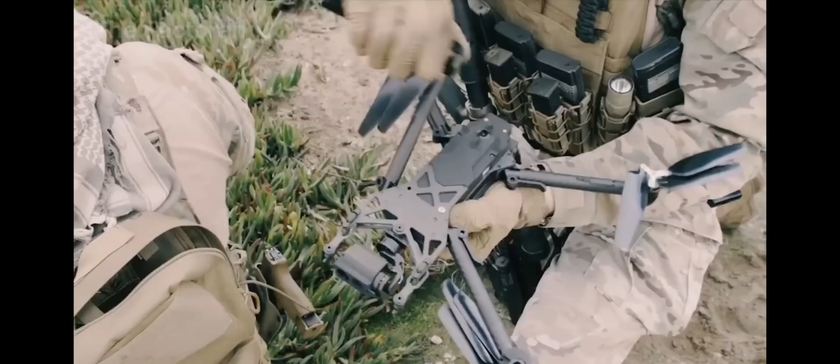Drones are at that exact moment right now. They look like toys. Some of them are toys. But underneath, there's an industry that governments are pouring money into, because whoever controls the airspace, cheaply, safely, at scale, controls a huge slice of farming, logistics, defense, mapping, and emergency response. Let me give you the real picture, not the brochure version.

In India, farmers are using drones to spray pesticide over an entire acre in about 7 minutes, work that used to take a man with a tank on his back the better part of a day, breathing in chemicals the whole time. That's not a gadget. That's a health upgrade and a time machine rolled into one.

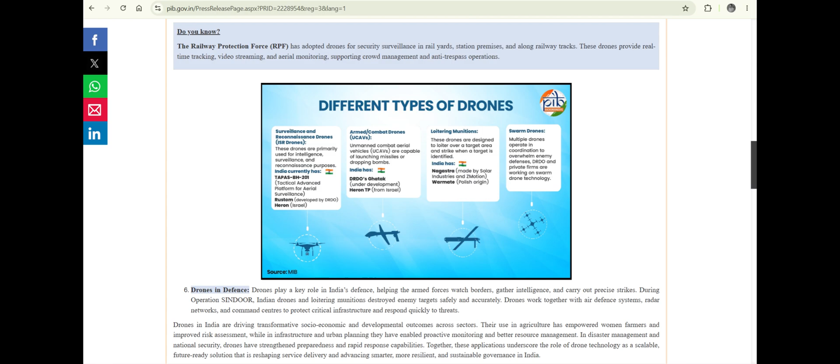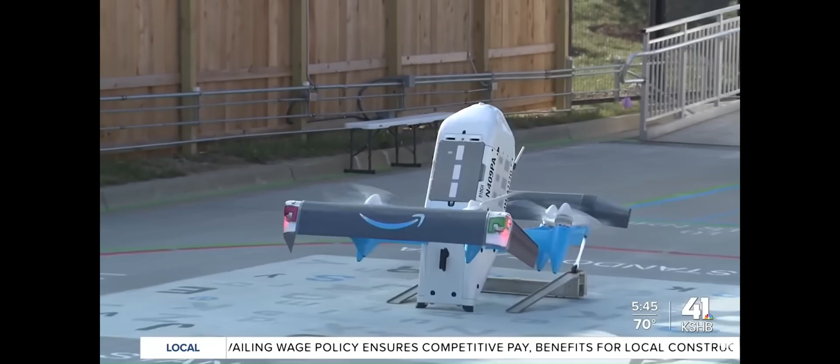In the military, surveillance drones can loiter over an area for hours, silently, watching, without putting a single pilot at risk. That capability has completely rewritten how modern conflicts are fought. Amazon and a dozen other companies are running real delivery experiments. Drop the package in the backyard. No truck, no traffic, no driver. It's not everywhere yet, and there are good reasons for that we'll get to. But the prototypes fly today.

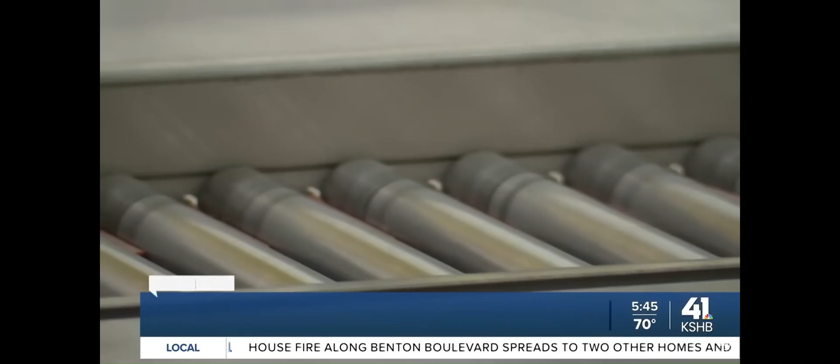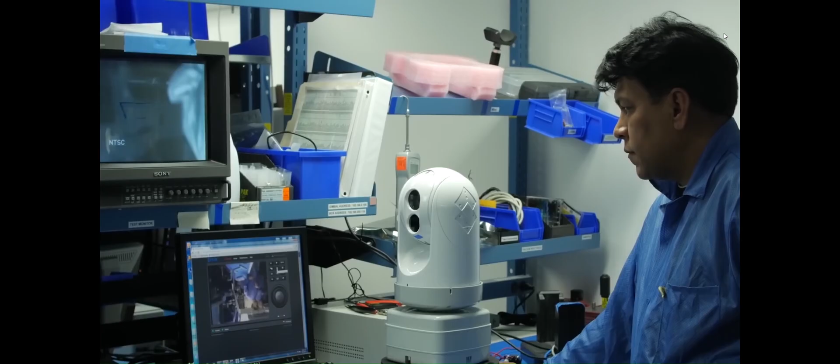In search and rescue, a thermal camera drone can sweep a hillside at night and spot the body heat of a missing hiker in 20 minutes, a search that would take a human team an entire freezing night and might fail anyway. Engineers use them to inspect bridges, cell towers, wind turbines, and power lines, climbing 200 feet so a human doesn't have to dangle off a rope to check for a crack.

And, my personal favorite, those jaw-dropping drone light shows, where 500, 1,000, sometimes 10,000 drones paint a moving picture across the night sky. Every one of those dots is a flying computer holding its exact GPS position to within a few centimeters. That's not magic. That's the stuff we're about to learn.

So here's my promise. If you stick with me today, you will never look at a drone the same way again. You'll see the forces, the physics, the brain inside it. Let's go. Okay. First question.

What is a drone? And before you answer the flying thing with 4 propellers, let me stop you. Because that's like saying a car is the thing with 4 wheels. Technically true, completely missing the point.

Here's the cleanest way I can put it. A drone is any aircraft that flies without a human pilot sitting inside it. That's it. That's the heart of it. No cockpit, no person on board. The pilot is somewhere else, on the ground with a controller, or not even controlling it at all because a computer is. Now, here's where it gets interesting.

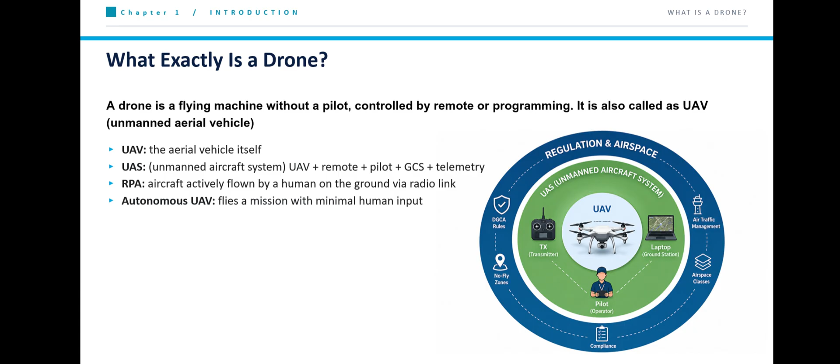Your hobby drone? You're flying it, so it's mostly an RPA. But the moment you hit return to home and it flies itself back and lands on its own, congratulations, for those 30 seconds it became autonomous. See how these aren't rigid boxes? They're modes. That's the practical truth most beginners miss.

Now, how did we get here? Because drones did not start as fun. Let me tell you the story, and I promise it's better than it sounds. Rewind to 1918, the First World War. There's an engineer named Charles Kettering, same guy, by the way, who later helped invent the electric starter in your car. And the US military asks him to build a flying bomb.

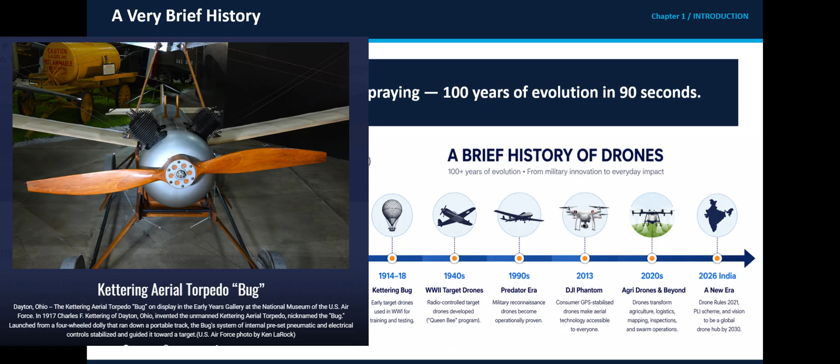Not a missile as we know it. A little wooden and canvas biplane with no pilot that you'd wind up like a clock. It would fly a set distance, the wings would literally fall off on a timer, and it would drop onto the enemy. They called it the Kettering Bug. And honestly, it barely worked. It crashed more than it flew. The war ended before it ever saw real combat.

But here's why it matters. For the first time, somebody built an aircraft designed to fly without a person inside it. The idea was born. A flying machine that didn't need a human heartbeat on board. Fast forward to the 1930s, Britain.

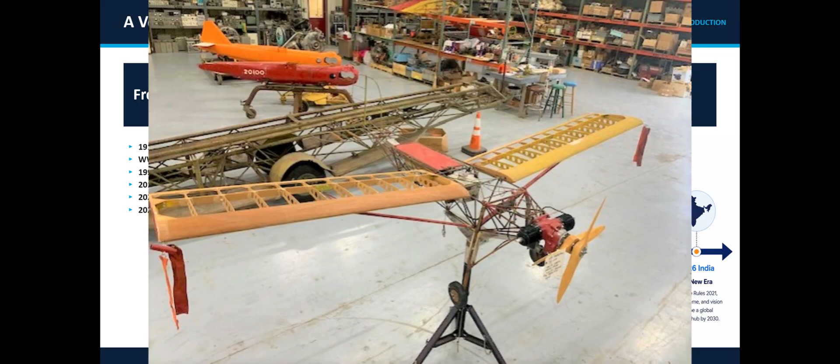The Royal Air Force needs targets for their gunners to practice shooting at. Real planes are expensive and have people in them. So they build radio-controlled aircraft to fly around as flying targets. And they give it a wonderful name, the Queen Bee.

And here's a little piece of trivia I love. A lot of historians believe that's where the word drone comes from. A drone is a male bee. The queen bee was the target. The smaller pilotless aircraft buzzing around? Drones. The name stuck for 100 years because of a bee joke. Aviation, ladies and gentlemen. Now jump forward to the 1990s and 2000s, and the story turns deadly serious.

The Predator drone. This is the machine that changed modern warfare. Suddenly, you had an aircraft that could stay in the sky for 20+ hours, beam back live video, and be flown by a pilot sitting safely on another continent. No pilot at risk. Eyes everywhere, all the time. Every military on Earth took notice, and the drone arms race began.

So for almost 90 years, from 1918 to about 2010, drones were basically a military story. Expensive, secretive, scary. And then one company flipped the entire script. A Chinese company called DJI. Around 2013, they did something nobody else had managed. They took all this insanely complex flight technology, the stabilization, the GPS, the cameras, and they packed it into something a teenager could buy and fly in their backyard for a few hundred dollars.

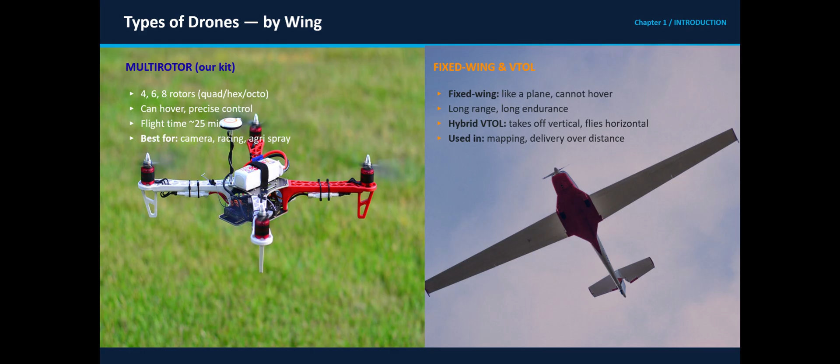So already you see the tension, right? Multirotor. Amazing control, terrible endurance. Fixed wing. Amazing endurance, can't hover. Wouldn't it be great to have both? Type 3. VTOL. Vertical takeoff and landing. And this is the clever hybrid.

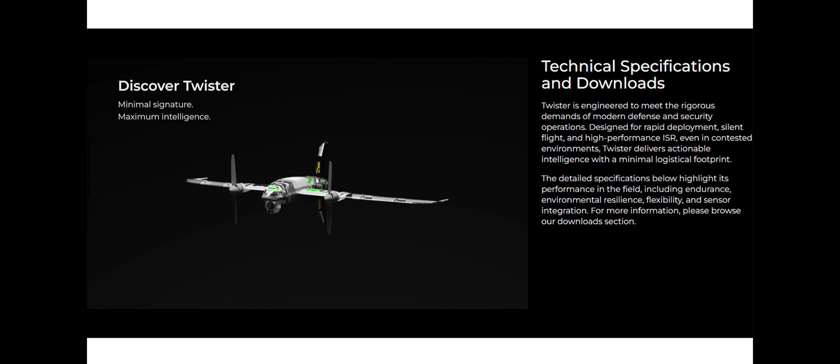A VTOL drone takes off straight up like a helicopter, props pointing down, then tilts and transitions into flying forward like an airplane on its wings. Best of both worlds. Take off from a tiny space, then cruise efficiently for hours. The perfect everyday comparison? A VTOL is like a hybrid car. A petrol car has great range, an electric scooter is great in the city. The hybrid tries to give you both.

VTOL drones try to give you the hover of a helicopter and the endurance of an airplane. They're more complex, more expensive, harder to engineer. But for things like long-range delivery and military reconnaissance, they're becoming the holy grail. Three families: helicopter, airplane, hybrid. Keep those pictures in your head.

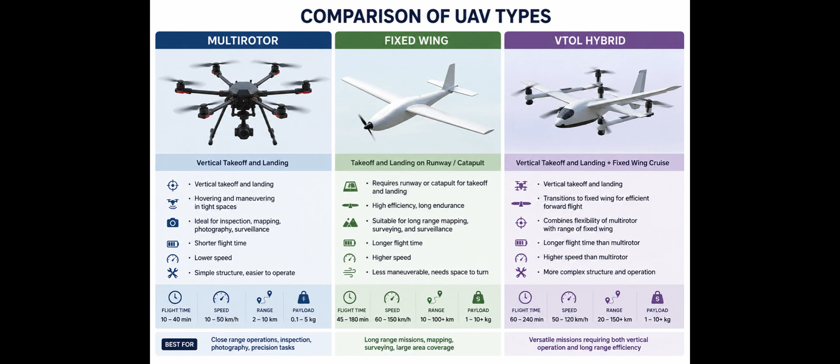Now, since most of you are going to start with multirotors, let's go deeper into this family. Because multirotor just means more than one rotor, and the number of rotors changes everything. Let's count up. Single rotor, one main rotor. This is basically a tiny helicopter. And the most famous example is a jaw-dropper, the Black Hornet Nano.

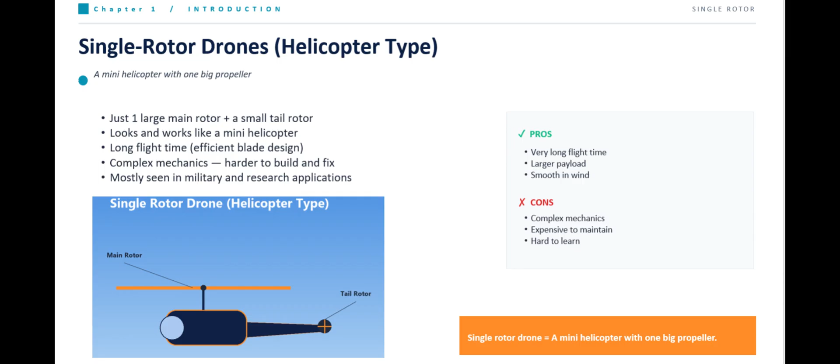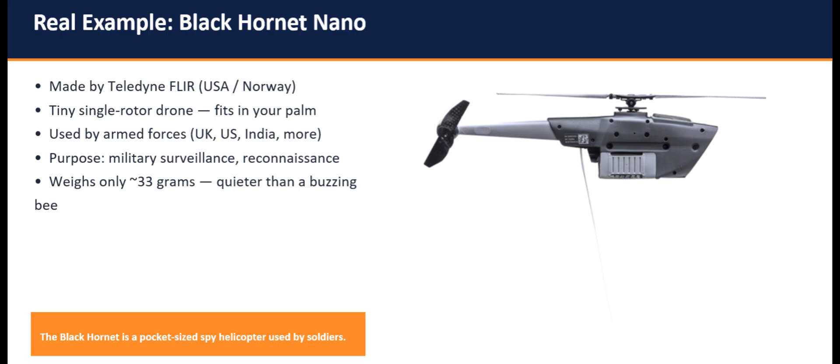This is a military micro-drone, so small it fits in the palm of your hand, weighs about as much as a few sheets of paper, and soldiers carry it in their pocket. They throw it up, and it silently scouts around the next corner or over the next wall, sending back video, and the enemy never even hears it.

A pocket-sized helicopter spy. Single rotor designs are efficient, but they're mechanically complex. Like real helicopters, they need a tail rotor and a complicated head to control them. Tricky to build, tricky to fly.

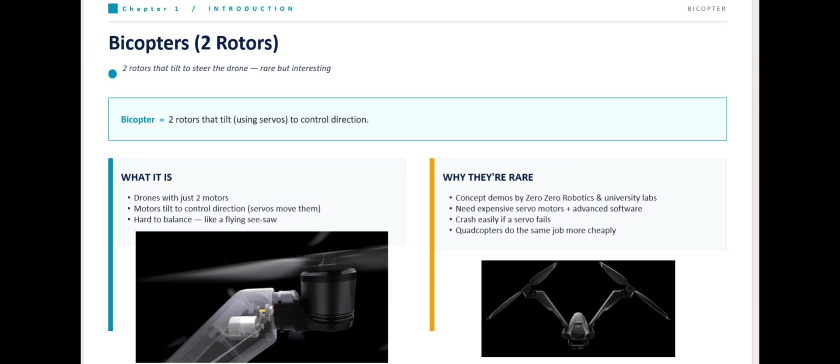Bicopter. Two rotors. And here's a fun one. Why did the bicopter basically never catch on? Because two motors is just not enough control. With only two points of thrust, the drone has to physically tilt its motors with extra mechanical parts just to steer and stay stable. It's wobbly, it's complicated, and it gives you all the headaches with none of the benefits.

So engineers mostly looked at it and said, yeah, let's add more motors. Nature did the same thing with insects. By the way, almost nothing useful balances on just two points.

Tricopter. Three rotors. Now this one is genuinely interesting from an engineering point of view, and it teaches us something important. Three motors can lift you fine. But here's the problem. Yaw. Yaw is rotation, spinning left and right, like shaking your head no. On a tricopter, you've got three props, and the math doesn't balance out cleanly to control that spin.

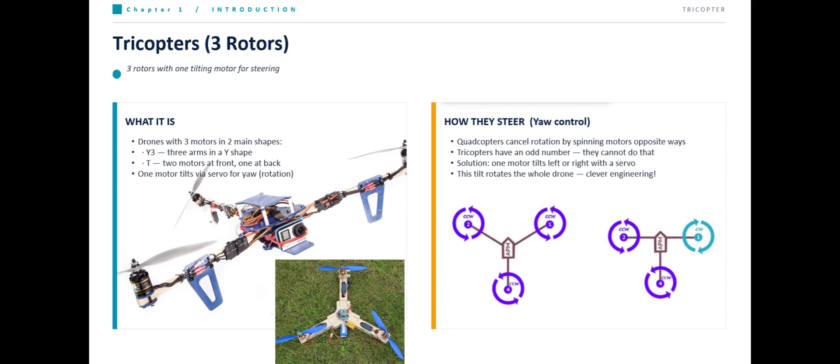So tricopters use a little servo motor that physically tilts the rear motor to control yaw. It works, and tricopters fly beautifully and smoothly. But that tilting mechanical part is one more thing to break, one more thing to fail. Remember this yaw problem, because in a second you'll see how the quadcopter solves it with pure elegance and zero moving parts.

Quadcopter. Four rotors. And this is the king. This is the one on my table. This is 90% of the drones you'll ever see or fly. Why? Because four is the magic number. Four motors give you perfectly balanced lift, perfectly balanced control.

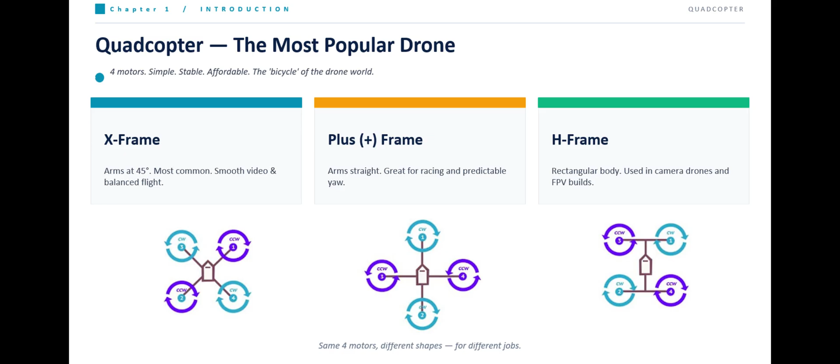And here's the beautiful part. You solve that yaw problem with no extra mechanical parts at all. Just by spinning some motors a little faster than others, you get full control in every direction. Simple, cheap, reliable, brilliant. The examples here are the famous ones.

The DJI Mini Series, tiny, featherweight, designed to slip under the strictest weight regulations so beginners can fly almost anywhere. The DJI Air Series, the sweet spot, more camera, more power, still portable. The DJI Mavic Series, the foldable pro-grade workhorse that put a cinema-quality camera in a backpack.

And on the wild end, FPV racing drones, where pilots wear goggles, see through the drone's eyes, and rip through courses at over 100 kilometers an hour. Same four-rotor layout. Completely different soul. One's a flying tripod, the other's a flying roller coaster.

Now let's go bigger. Hexacopter. Six rotors. Why would you need six? One word, and it's the most important word in professional drones: redundancy. Let me paint you a scene. You're a film crew. You've strapped a $40,000 RED cinema camera under your drone. You're flying it over a crowd at an outdoor concert. You've got one shot at the scene.

Now, what happens if a motor fails midair? On your little quadcopter, a motor failure is a disaster. You've lost one of four corners of lift. The drone immediately becomes unbalanced and flips, and it falls out of the sky like a stone. $40,000? Gone. Worse, it falls into a crowd.

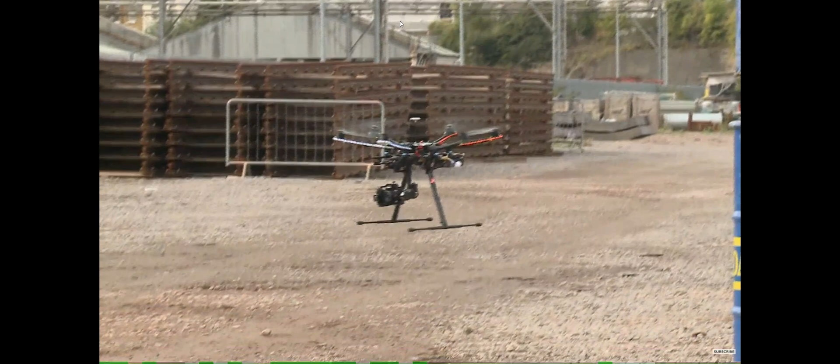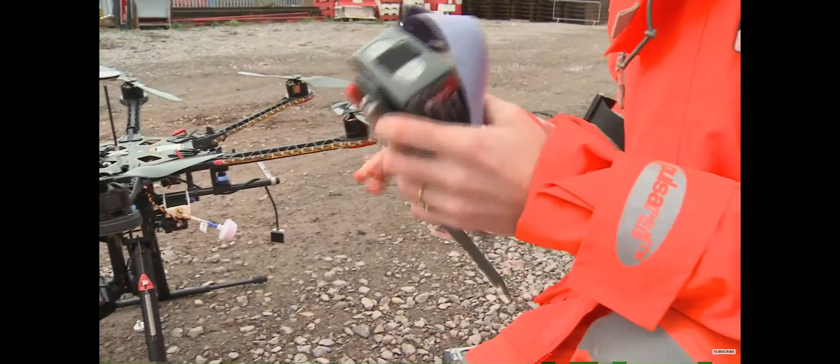On a hexacopter, one motor dies, and the flight controller, the brain, instantly goes, "No problem, I've got five more." It redistributes the power across the remaining motors and keeps flying, or at least limps down to a safe, controlled landing. That single extra layer of safety is everything when there's expensive gear or people below.

That's why you'll find 6 rotors on the DJI Matrice 600, on professional cinema rigs carrying those RED cameras, and on industrial inspection drones crawling over oil refineries and power lines where a crash isn't just expensive, it's dangerous. Redundancy. Write that down. It's the reason professionals add motors.

Octocopter. 8 rotors. Now we're at the top of the food chain. Why 8? 2 reasons, and they're the same 2 reasons rolled into one big machine. First, raw lifting power. 8 motors can hoist heavy payloads. Second, even more redundancy. You could lose a motor, maybe even 2, and still fly home safely.

The poster child here is the Freefly Alta X, an absolute beast of a flying platform that the film industry trusts with cameras worth more than a car. We're talking heavy lift cinema setups, large agricultural drones hauling tanks full of pesticide over fields, industrial logistics drones moving real cargo. So why do movie productions hand their most expensive equipment to an octocopter and sleep fine at night?

Because they're not paying for the 8th rotor to go faster. They're paying for insurance. They're paying for the night the director gets the perfect golden hour shot, a motor coughs and dies, and the drone just shrugs and keeps filming. When the gear under your drone costs more than your house, you do not gamble on 4 motors. You buy 8. Redundancy, again.

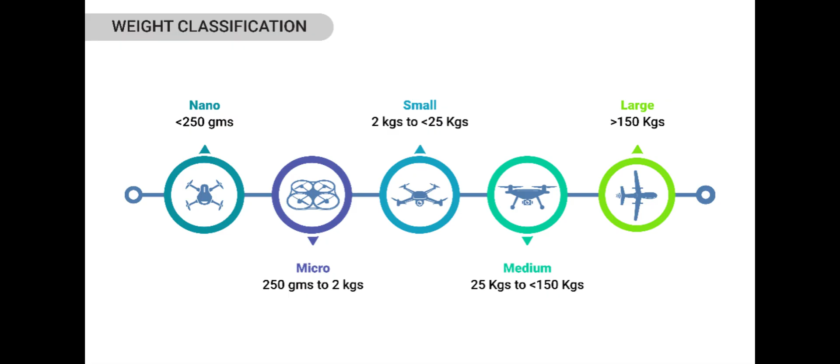Micro. From 250 grams up to 2 kilograms. This is where a huge chunk of hobby and prosumer drones live. Your DJI Air, many Mavics, lots of camera drones. Heavier, more capable, more camera. And now the rules tighten a bit. You're starting to carry enough mass that the regulator pays attention.

Small, from 2 kilograms up to 25 kilograms. Now we're into serious working machines. Many professional cinema drones, survey drones, and the smaller agricultural sprayers land here. These aren't toys anymore. These are tools that earn money, and the rules reflect that.

Medium, from 25 kilograms up to 150 kilograms. This is heavy lifting territory. The big agricultural spraying drones that haul large tanks of liquid across farmland often sit in this class. Big delivery drones too. At this weight, you're operating a genuine aircraft, and certification and permissions get serious.

Large, above 150 kilograms. And now we've left Hobbyland entirely. This is the domain of military drones and major commercial cargo and surveillance aircraft. A drone this big is treated almost like a manned aircraft, because in terms of mass and risk, it basically is one. The Predator we talked about earlier, that's not a drone you fly in a park. That's large category aviation hardware.

So look at the whole ladder. A 249-gram DJI Mini in your backpack and a 1,000-kilo military surveillance aircraft are both technically drones, but the DGCA treats them completely differently. And now you understand exactly why. Weight equals risk. Risk equals rules. The heavier you fly, the more the sky demands of you.

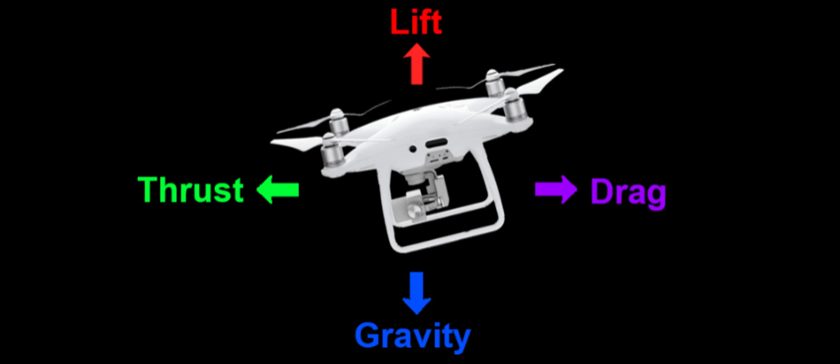Let me make thrust physical for you. Have you ever stuck your hand out the window of a moving car? Of course you have. Now, tilt your hand up slightly, palm angled into the wind, and what happens? Your whole arm gets pushed back and up. You can feel the air shoving it. That push is exactly the kind of force a propeller creates, just controlled and aimed. Your hand became a wing. You've been doing physics experiments out of car windows your whole life and didn't know it.

Force 4. Drag. This is the invisible enemy, air resistance. The friction of pushing through the atmosphere. Drag always fights your motion. It's constantly trying to slow you down. Anything moving through air feels it. The perfect example? A motorcycle. When you ride slowly, you barely notice the air.

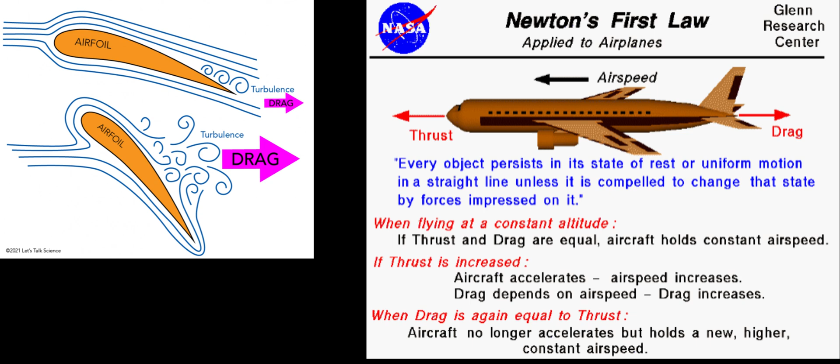But twist the throttle and hit 100 kilometers an hour, and suddenly the wind is screaming past you, trying to rip you off the seat, pushing back hard against your chest. That push is drag. The faster you go, the harder drag fights you. It's the reason racing motorcyclists tuck down flat. They're hiding from drag. And it's why drones, jets, and even cyclists are shaped smooth and sleek. Every curve is a little argument against drag.

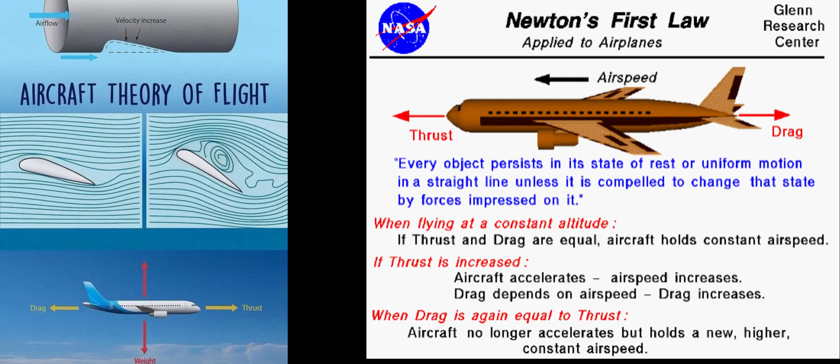So there it is. 4 forces, locked in a constant tug-of-war. Lift versus weight, up versus down. Thrust versus drag, forward versus backward. Every flight you've ever seen is just these 4 numbers shifting around.

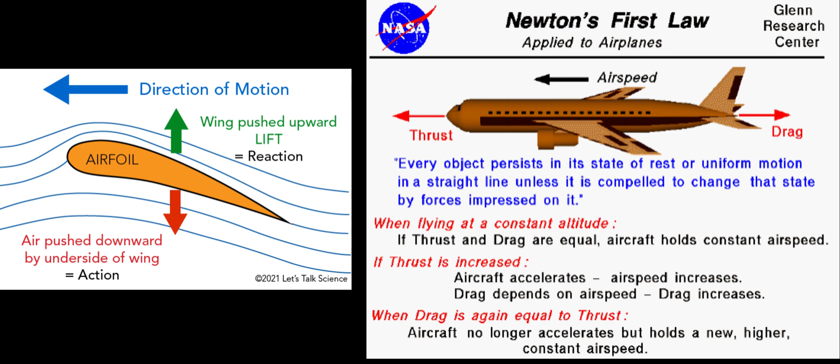Want to climb? Beat weight with lift. Want to speed up? Beat drag with thrust. Want to hover? Make it all a perfect tie. That's flight. That's the whole secret.

And one more time, throw a paper airplane across the room. In that 2-second flight, all 4 forces were at play. Lift held it up, weight pulled it down, your throw gave it thrust, and drag slowed it until it lost the fight and glided to the floor. 4 forces in a toy made of paper. The sky doesn't care if you're a Boeing or a paper plane. Same rules for everyone.

So lift is the hero. But how does a spinning piece of plastic actually create it? This is where most explanations either lie to you or bore you, and I want to do neither. Because the truth is, there are 2 explanations, and both are right, and engineers use both. Explanation 1: Bernoulli's principle. Here's the idea.

A propeller blade isn't flat. It's shaped, curved on top, flatter on the bottom. As it spins, air rushing over the curved top has to travel faster than the air underneath. And here's Bernoulli's beautiful, slightly weird rule: fast-moving air has lower pressure. So you get low pressure on top of the blade, higher pressure underneath. And that pressure difference sucks and pushes the blade upward. Multiply that across spinning blades, and you get lift.

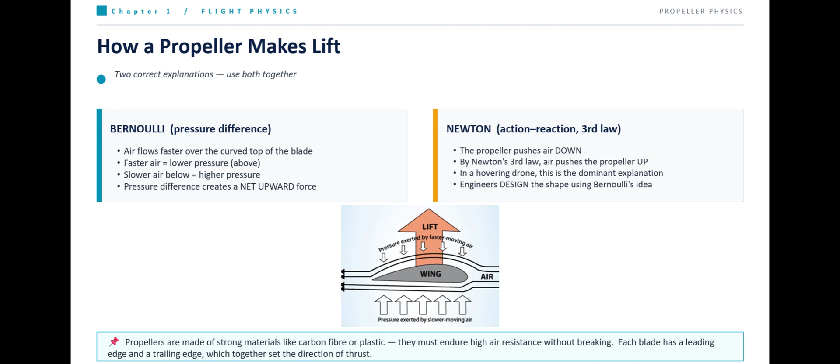Now, I know what you're thinking. Faster air has lower pressure? That sounds made up. So let me prove it to you right now, with nothing but 2 sheets of paper. I want you to actually do this. Pause the video if you have to. Take 2 ordinary sheets of paper. Hold them up vertically, hanging down, parallel to each other, with a small gap between them, maybe a few centimeters.

Now, common sense says, if I blow air into that gap, the papers should fly apart, right? The air should push them away from each other. That's the obvious answer. Watch what actually happens. I blow air straight down the gap between them, and the papers snap toward each other. They come together, the exact opposite of what you'd expect.

Why? Because by blowing, I made the air between the sheets move fast. And fast air, Bernoulli, is low pressure. Meanwhile, the air on the outside of the sheets is still calm, normal, high pressure. So you've got high pressure on the outside pushing in, low pressure in the middle, and the sheets get shoved together by the surrounding air. The papers didn't move because of my breath pushing them apart. They moved because I created a low pressure zone and the higher pressure around them pushed them in.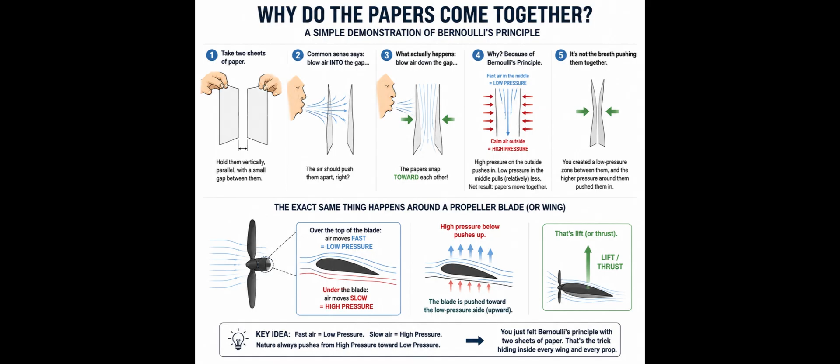That, right there, is exactly what happens around a propeller blade. Fast air, low pressure on one side. Slow air, high pressure on the other. And the blade gets pushed toward the low pressure side, upward. You just felt Bernoulli's principle with 2 sheets of paper. That's the trick hiding inside every wing and every prop on Earth.

Explanation 2: Newton's third law. But there's a second, blunter way to see it, and it's just as true. Newton's third law: for every action, there's an equal and opposite reaction. A propeller is, basically, a fan. It grabs a huge column of air and throws it downward. And if the prop throws air down, then by Newton, the air throws the prop UP with equal force. Push the air down, you get pushed up. It's that simple. Stand under a flying drone and you can feel the downwash. That's the air it's throwing at the ground to hold itself up.

So which explanation is correct? Bernoulli or Newton? And here's the answer that separates a real engineer from someone who just memorized one line in a textbook. They're both correct. They're 2 languages describing the same event. Bernoulli describes it through pressure differences. Newton describes it through air being thrown downward. Same lift, 2 viewpoints. And here's how engineers actually use both when designing a propeller.

They use Bernoulli to perfect the shape, the exact curve of the blade, the airfoil, so the air flows smoothly and creates that pressure difference efficiently without turning into turbulent chaos. And they use Newton to think about the brute force. How much air can this blade physically grab and hurl downward per second? Shape and force. Pressure and momentum. A great propeller is a marriage of both ideas. That's why prop design is real engineering and not just make a fan.

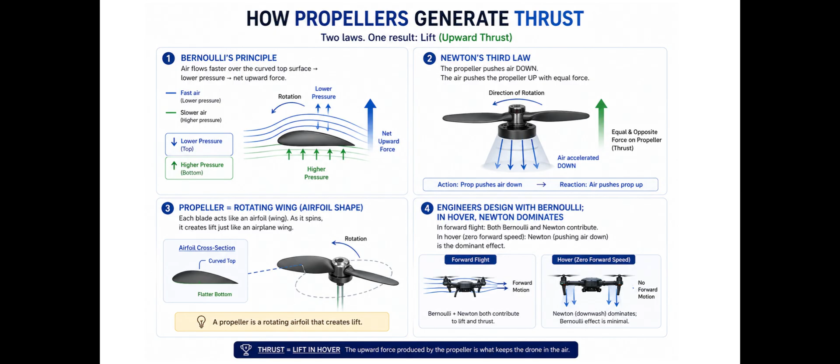Beautiful, isn't it? Now that you know why a prop makes lift, let's actually look at one. Because the anatomy matters more than you think.

Holds up a propeller. Run your eye along the blade. The front edge, the one that slices into the air first as it spins, that's the leading edge. It's usually rounded and smooth, designed to cut cleanly into the air. The back edge, where the air leaves the blade, is the trailing edge, usually thinner and sharper, so the air can flow off cleanly without making a mess of turbulence.

The cross-section shape of the blade, that curved on top, flatter on bottom profile we just talked about, that's the airfoil. That's the magic shape doing the Bernoulli work. Now two numbers define almost everything about a prop's personality. First, diameter, how wide the prop is, measured tip to tip across the full circle it sweeps. Bigger diameter grabs more air, which generally means more lift and more efficiency. But it also takes more power to spin and responds more slowly.

Second, and this is the one beginners always misunderstand, pitch. Pitch is the angle of the blade, and here's the best way to grasp it. Pitch is the theoretical distance the prop would move forward in one full rotation, like a screw going into wood. A high-pitch prop is like an aggressive screw. It takes a big bite of air with every turn and tries to move a long way forward. A low-pitch prop takes a gentle, shallow bite.

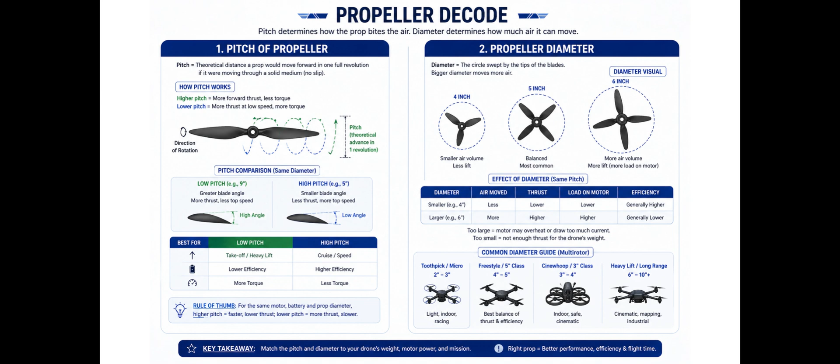So let me make pitch real with a question. Why does a racing drone use totally different props than a smooth cinematic drone? Think about a bicycle with gears. A high gear, like high pitch, gives you huge top speed, but it's brutal to get moving and it exhausts you. A low gear, like low pitch, gets you moving instantly and climbs hills easily, but it tops out slowly.

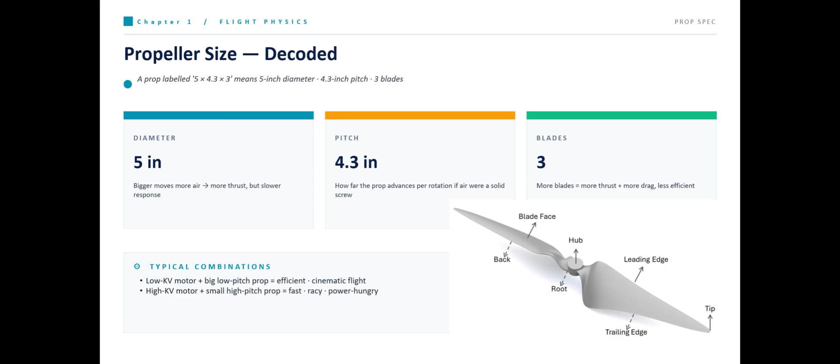A racing drone wants raw speed and savage acceleration, so it uses aggressive, high-pitch props, big bites of air, maximum thrust. Who cares about battery life when the race is over in two minutes? A cinematic drone wants smoothness, efficiency, and long flight time to get the perfect shot. So it uses gentler, low-pitch props that sip power and respond softly and steadily, no jerky movements to ruin the footage. Same physics, completely different tuning, because they want completely different things. Change the pitch, and you change the entire soul of the drone.

Okay, now we need to talk about how a drone moves in 3 dimensions. And there are 3 magic words: pitch, roll, and yaw. These confuse everyone at first, until I show you the trick I'm about to show you. Because you already know all 3. You do them with your own head. Ready? Use your own body with me.

Pitch. Nod your head, yes. Up and down, tilting forward and back. That's pitch. When a drone pitches, it tips its nose down to fly forward, or tips its nose up to fly backward. Pitch is yes. Nodding forward to go forward. Yaw. Now shake your head, no. Left and right. Rotating, turning. That's yaw. When a drone yaws, it spins in place, rotating to face a new direction without actually moving anywhere. Yaw is no. Turning to look around.

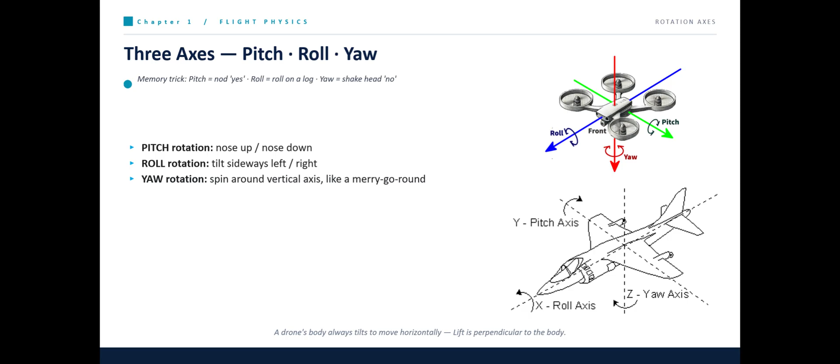Roll. Now tilt your head sideways toward your shoulder, like you're trying to touch your ear to your shoulder. That leaning, tilting sideways motion, that's roll. When a drone rolls, it tips left or right to slide sideways through the air. Roll is leaning over. Let me say it one more time, because I want this burned into your memory forever. Pitch is nodding yes. Yaw is shaking no. Roll is leaning your head sideways. Yes, no, sideways. You will literally never forget it now, because you'll always have your own head to check against. Every fighter pilot, every drone pilot, every astronaut uses these exact 3 words, and now you own them too.

Here's the part that genuinely blew my mind when I first understood it. A quadcopter has no moving parts for steering, no flaps, no tilting motors, no rudders, nothing mechanical like an airplane. It does everything, every move in the sky, just by changing how fast each of its 4 motors spins. That's it. Differential motor speed. Let me walk you through every move. First, an important detail. On a quad, the motors don't all spin the same direction. Two spin clockwise, two spin counterclockwise, arranged diagonally.

Remember that it's the key to the whole magic trick, especially yaw. Hover. All 4 motors spin at the exact same speed, fast enough that total lift perfectly equals weight. Everything's balanced, nothing's tilted, and the drone just hangs there, frozen in the sky. Perfect. Beautiful.

Climb. Want to go up? Easy. Speed all 4 motors up equally. Now lift beats weight, and the whole drone rises straight up, staying perfectly level. Want to descend? Slow all 4 down equally, weight wins, and it sinks gently straight down.

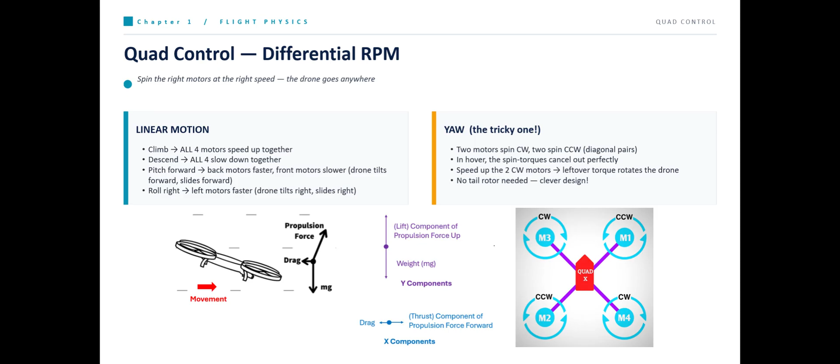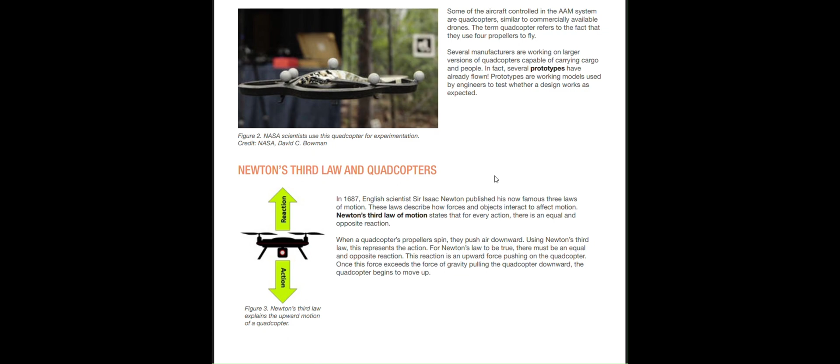But if you speed up the 2 clockwise spinning motors and slow down the 2 counterclockwise ones, you unbalance that twist. Suddenly there's a net rotational force, and the whole drone slowly spins in place. It yaws. No moving parts. Just smartly unbalancing the spin of the motors. The tricopter needed a mechanical servo to do this. The quadcopter does it with pure cleverness. That's the engineering beauty of four rotors.

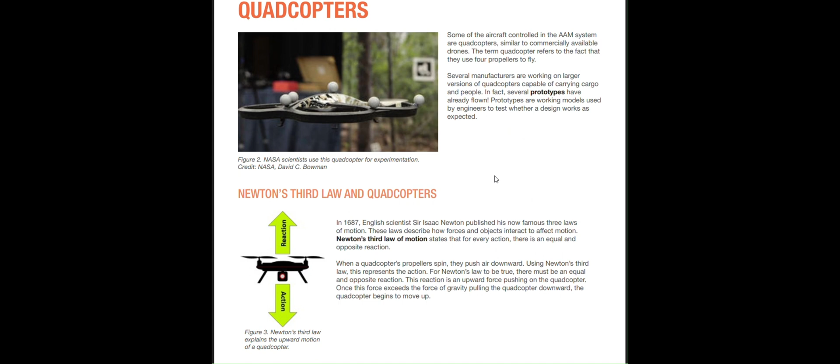So step back and look at what we've got. Climb, descend, forward, back, left, right, and spin, every possible movement in three-dimensional space, all controlled by nothing more than four motors speeding up and slowing down in different combinations, hundreds of times per second. No gears, no flaps, just math and motors. It's honestly one of the most elegant control systems humans have ever built.

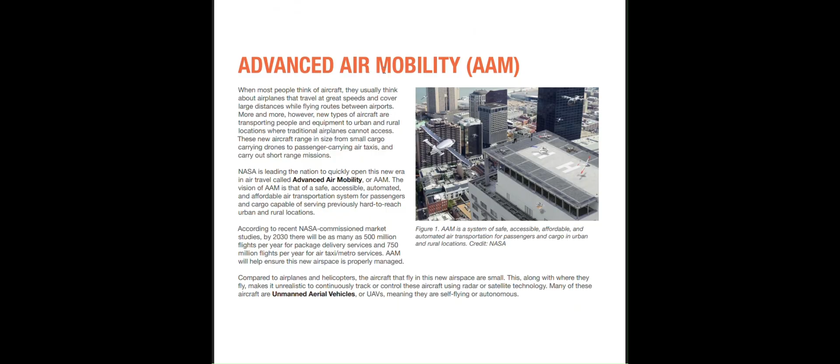And it raises one terrifying question. Who's doing all that math? Because here's a secret that should frighten you a little. A quadcopter is naturally unstable. Completely. On its own, with no brain, a quad cannot fly for even half a second. It would instantly tip, flip, and smash into the ground. It is fundamentally, physically unstable. So how does it hover so calmly?

Let me show you with a pencil. Try to balance this pencil straight up on the tip of your finger. Go on. What happens? It falls. Instantly. Now, can you actually balance it? Yes. But only if you constantly move your finger, making tiny corrections, left, right, forward, back, faster than you can even think about it. The moment you stop correcting, it falls.

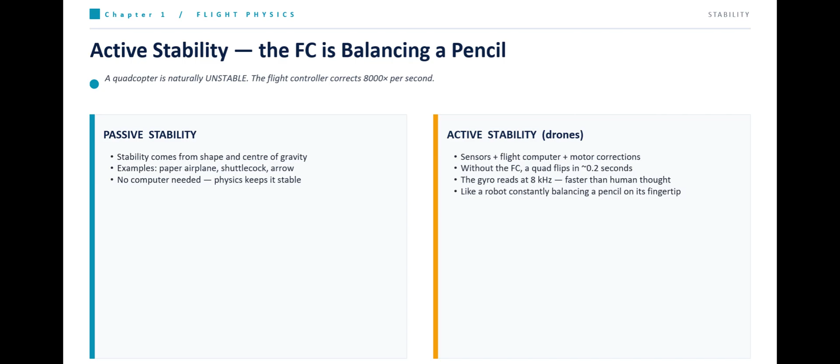Balancing a pencil isn't a state. It's a furious, never-ending stream of micro-corrections. That is exactly what a drone is doing every millisecond it's in the air. It is balancing a pencil, except it's balancing itself in three dimensions hundreds of times per second. And the finger doing all those corrections is a tiny brain called the flight controller. Let's meet the team inside it.

First sensor, the gyroscope. Its one job is to measure rotation, how fast the drone is tipping or twisting in any direction. It's the inner ear of the drone. The instant the drone starts to tilt even a hair, the gyro screams, "Hey, we're tipping right."

Second sensor, the accelerometer. Its job is to sense acceleration and, crucially, gravity, so it always knows which way is down. It's the drone's sense of balance, the thing that knows up is up. Together, the gyroscope and accelerometer are usually packed into one little chip that tells the drone its exact orientation in space at all times.

Then the boss, the flight controller. This is the brain, a tiny computer reading those sensors hundreds, sometimes thousands of times every second, comparing what's happening against what the pilot asked for, and barking orders to the four motors. Speed this one up, slow that one down, now, faster, correct, correct, correct. And the genius math it runs is called a PID controller. Don't panic about the letters. PID is just a brilliant way of answering three questions, constantly.

How far off am I right now? How fast am I drifting off? And how have I been trending over time? It blends those three answers into the perfect sized correction, not too weak, not too violent, just right. Too aggressive and the drone shakes and oscillates. Too gentle and it drifts and wobbles.

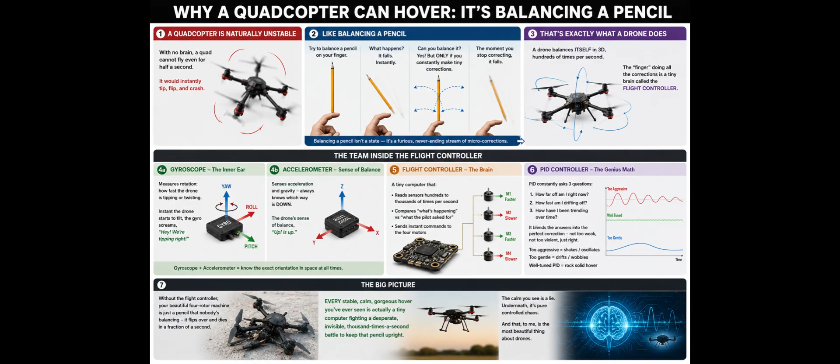Alright, let's talk about power and how engineers measure whether a drone is a sluggish truck or a screaming rocket. The magic number is the thrust-to-weight ratio, or TWR. It's exactly what it sounds like. Take all the thrust your motors and props can produce at full throttle and divide it by how much the drone weighs. That's your TWR.

Let's make it concrete. If your drone weighs 1 kilogram and your motors at full power can push 2 kilograms of thrust, your TWR is 2:1. You've got twice as much push as weight. So why does this number matter so much?

Think about it. If your TWR were exactly 1:1, thrust just barely equals weight. Your drone could only just hover. It would have zero power left over to climb, fight wind, or maneuver. It would be gasping at full throttle just to stay still. Useless. So you always need more than 1:1. The question is, how much more? And this is where the world splits in two.

A cinematic drone, the smooth camera platform, typically runs a TWR of around 2:1. That's plenty. It gives gentle, controlled, graceful movement, smooth acceleration, no jerkiness, and great efficiency for long flights. You don't want a camera drone to be twitchy and explosive, you want it calm and cushiony, like a luxury car gliding down the highway. Smooth footage demands a relaxed, well-mannered drone.

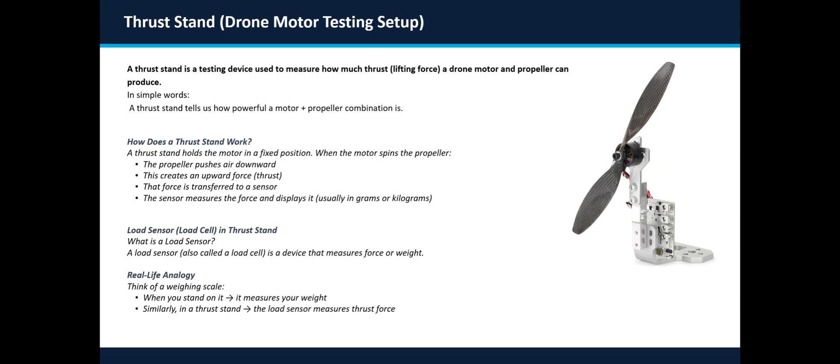Exactly. Real engineers don't guess and pray. They measure, they test, they know, and only then do they fly. The thrust stand is where confidence comes from. It's the difference between I think this'll fly and I know this'll fly.

Okay, take a breath. Look at how far you just came. When we started, a drone was just a mysterious flying thing with propellers. Now you know what a drone actually is. UAV, UAS, RPA, autonomous, and the real difference between them. You know the story, from a crashing wooden bomb in 1918, through the Queen Bee, the Predator, the DJI revolution, all the way to today's AI drones.

You know the three families, Multirotor, Fixed Wing, and VTOL, and why each one exists. You walked through the entire Multirotor family, from the pocket-sized Black Hornet all the way up to octorotor cinema beasts, and, most importantly, you understand why professionals add motors: redundancy, safety, lift. You know who polices the sky around the world: the FAA, EASA, CAA, CASA, CAAC, and our own DGCA. And why those rules exist at all. You can sort any drone into its DGCA weight class and explain the logic behind it.

And then we got to the good stuff, the physics. You now understand the four forces: lift, weight, thrust, and drag, locked in their eternal tug-of-war. You proved Bernoulli's principle with 2 sheets of paper. You learned that propellers use both Bernoulli and Newton. You can read a prop, leading edge, trailing edge, airfoil, pitch, diameter, and explain why racers and filmmakers choose different ones. You'll never forget pitch, roll, and yaw, because they're just nodding yes, leaning sideways, and shaking no.